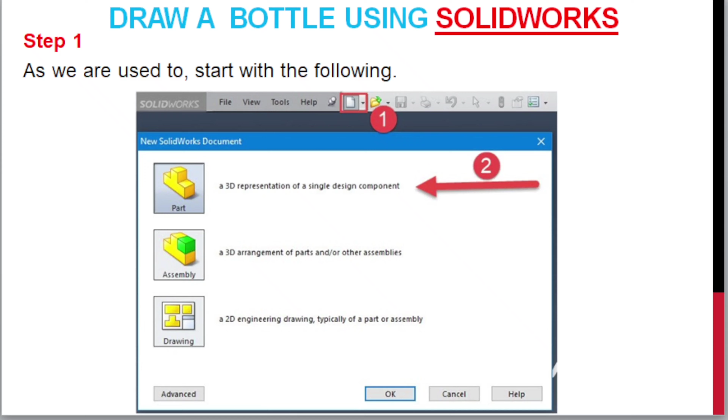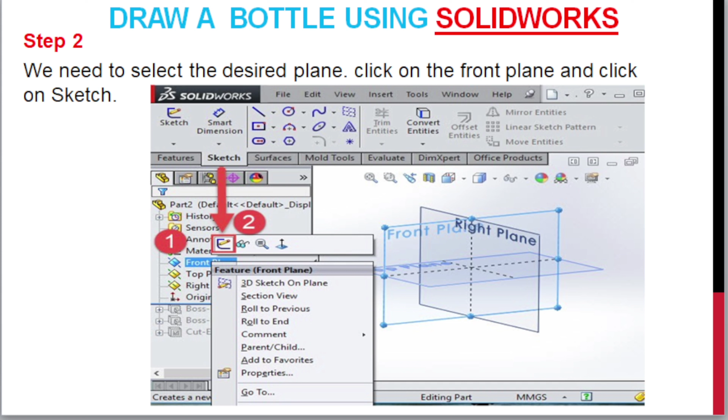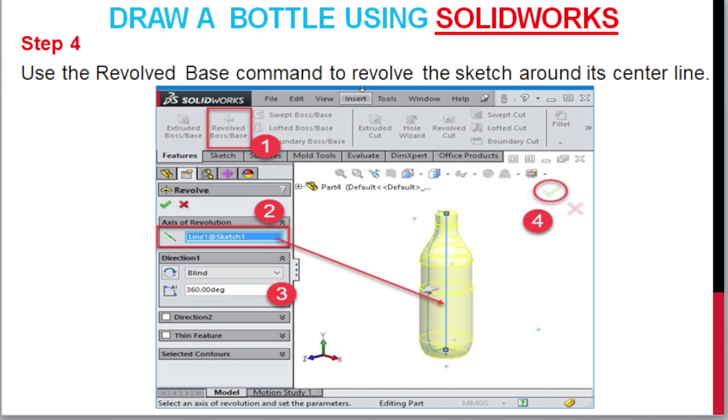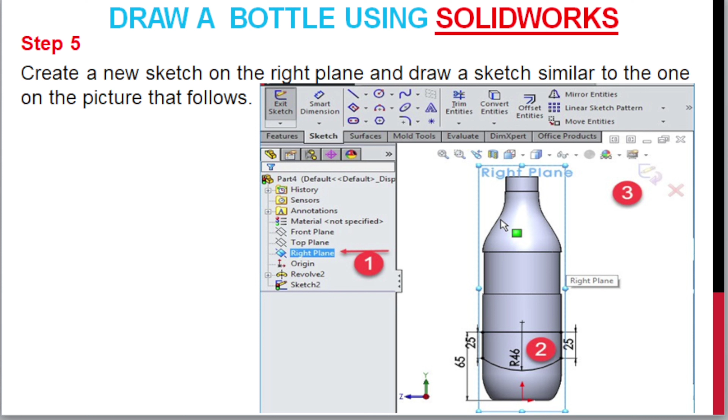Use the revolved base command to revolve the sketch around its center line. Create a new sketch on the right plane and draw a sketch similar to the one on the picture that follows.

Click on Extrude Cut, select the sketch and activate the second direction. Then select through all for both directions. After clicking on OK, a message will pop up and ask about bodies to keep.

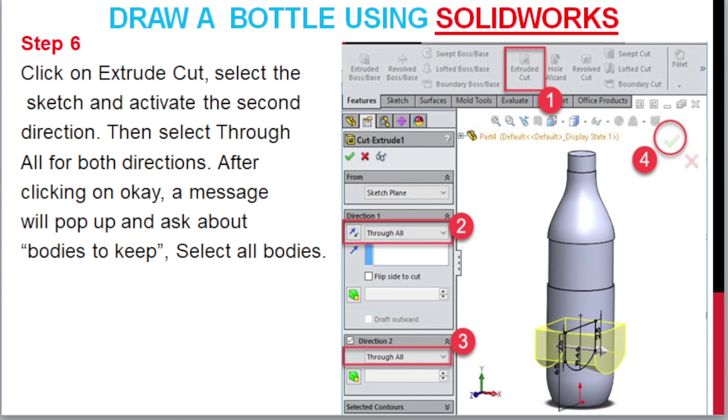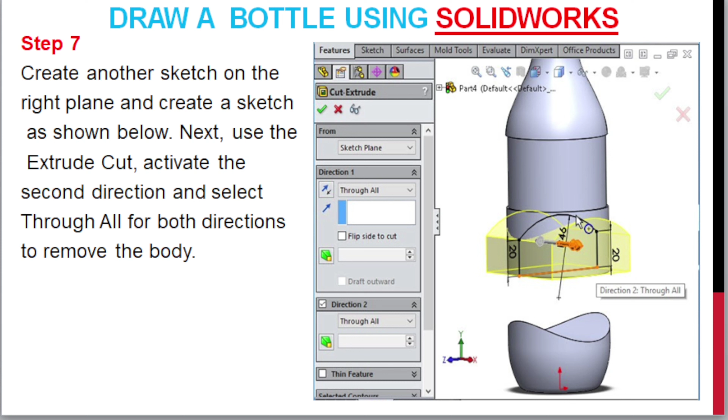Select all bodies. Create another sketch on the right plane and create a sketch as shown below. Next, use the Extrude Cut, activate the second direction and select through all for both directions to remove the body.

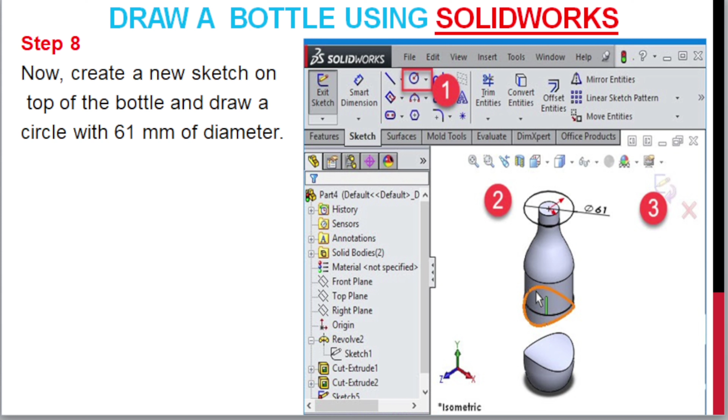Now, create a new sketch on top of the bottle and draw a circle with 61 mm of diameter. We want to project the circle we've created in step 8 on the highlighted area.

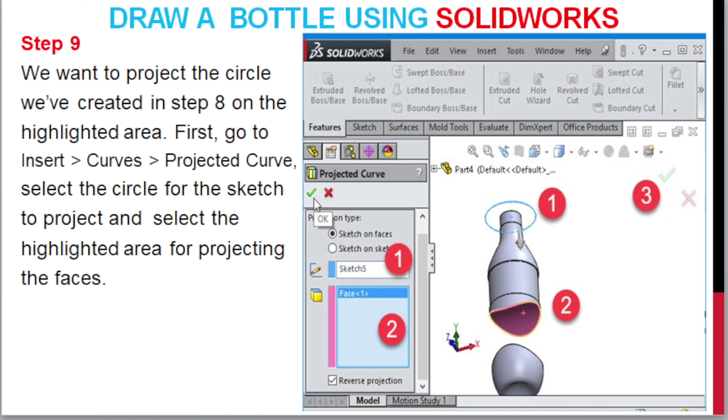First, go to Insert > Curves > Projected Curve, select the circle for the sketch to project and select the highlighted area for projecting the faces. We need to repeat step 9 for the bottom face.

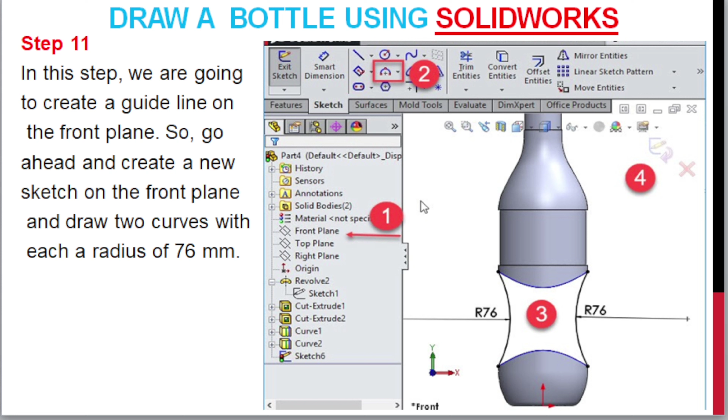In this step, we are going to create a guideline on the front plane. So, go ahead and create a new sketch on the front plane and draw 2 curves, each with a radius of 76 mm. We need 2 more guidelines.

This time create a new sketch on the right plane and draw 2 curves with radius of 110 mm. Select loft, the top and bottom faces, and most importantly, select the 4 guidelines we've created in step 11 and step 12.

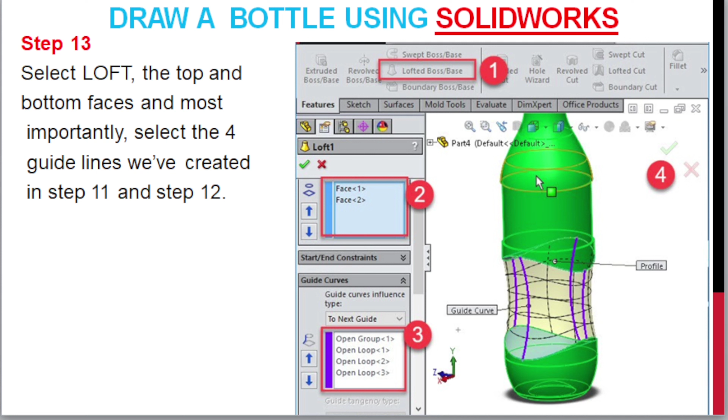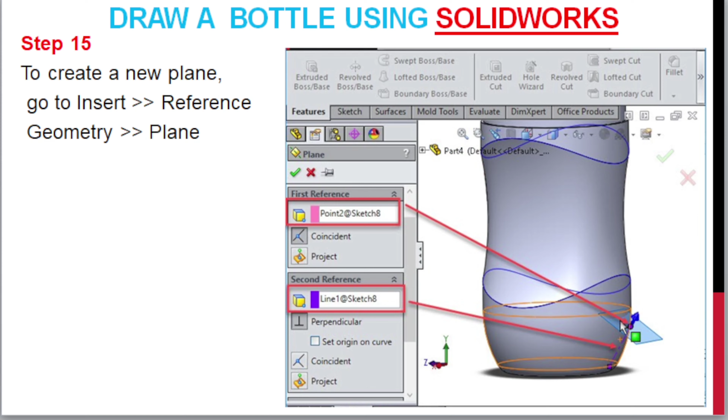Now, we are going to create another guideline for a new plane. To create a new plane, go to Insert > Reference Geometry > Plane. Now create a new sketch on the plane we've created in the previous step, and create a sketch similar to the one shown below.

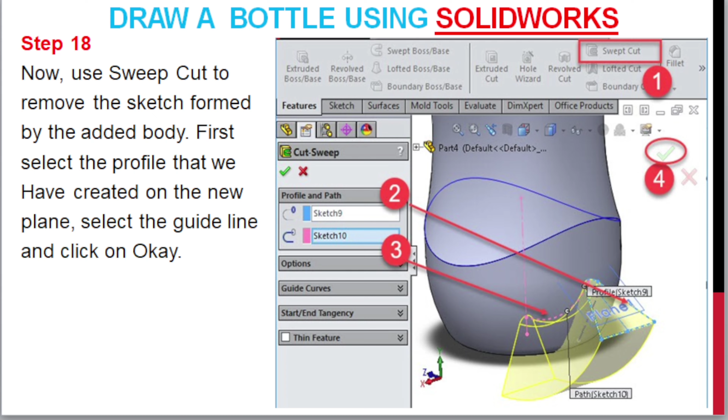Create another sketch on the right plane and draw a guideline like I am doing below. Now, use Sweep Cut to remove the sketch formed by the added body. First select the profile that we've created on the new plane, select the guideline and click on OK. Use the Fillet command to give a 4 mm fillet to the highlighted edges.